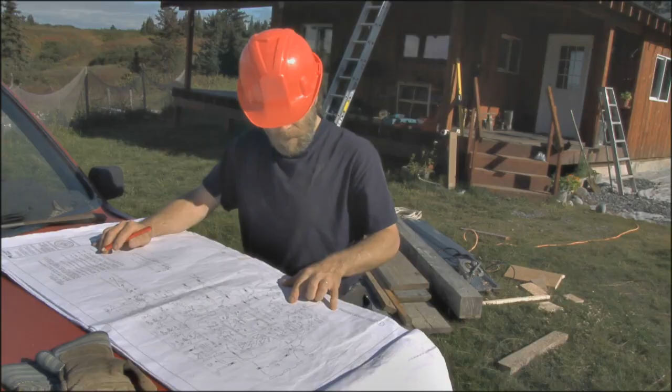This newfound awareness is appearing worldwide, whether it be building codes for new properties or protection enhancements in transportation vehicles. Evidence can be found in many aspects of our everyday lives that proves how the hard work and diligence of the world's brightest engineers and planners have made all of our lives safer and more enjoyable.

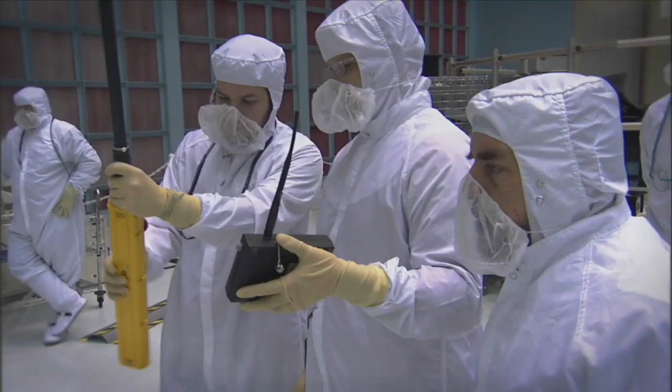The advance toward a safety-first mentality has been embraced by both the private sector and by government, with one of the most high-profile shifts coming from the government agency, NASA.

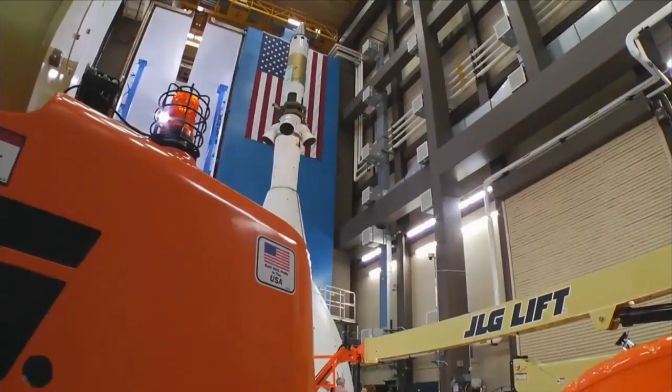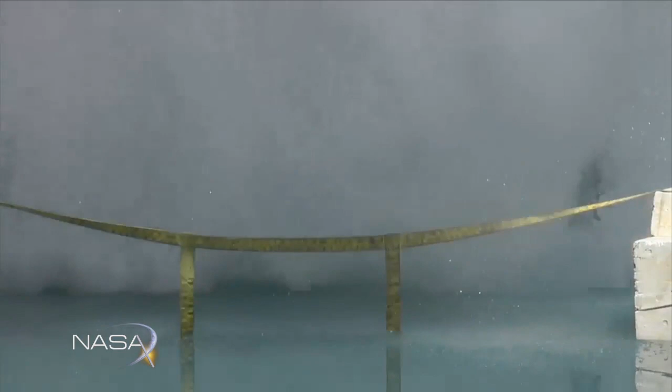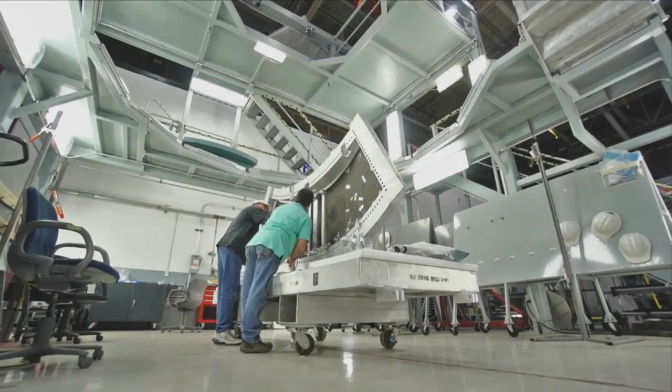Although NASA has always been focused on safety, recent developments in technology, as well as a desire to perfect systems and policies, has led to a heightened awareness within the space agency. Perhaps the most significant organization within NASA that typifies this culture is the aptly named NESC, or NASA Engineering and Safety Center. This highly skilled group is pushing the boundaries on safety even further in an effort to make systems within the agency as safe as possible.

Today on NASA X, we will follow members of the NESC as they test new designs to gain as much knowledge as possible about engineering safety. We will focus specifically on several new designs that will affect future spacecraft, and we will see how computerized modeling paired with hardware tests are now being used to pave the way for safe space systems of the future.

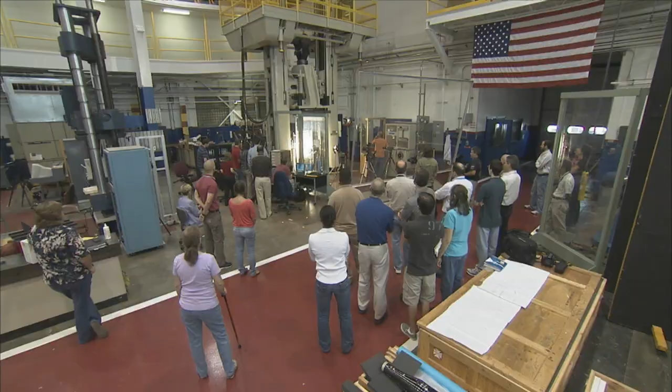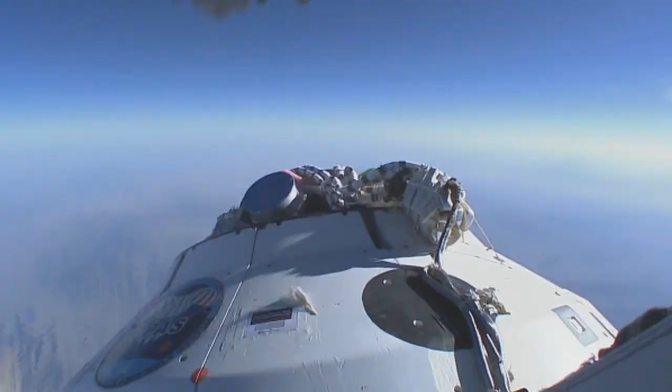As is so often true, our greatest lessons come from our greatest failures. What we learn from these failures influences our future decisions. This was indeed the case for NASA after the 2003 Columbia tragedy. Not long after this accident, NASA's Engineering and Safety Center was formed in an effort to find new ways to adequately address the importance of safety.

NASA realized the necessity to perform value-added independent testing, analysis, and assessments of high-risk projects to ensure safety and mission success. This type of approach assists in proactively identifying issues beforehand, helping NASA avoid future problems.

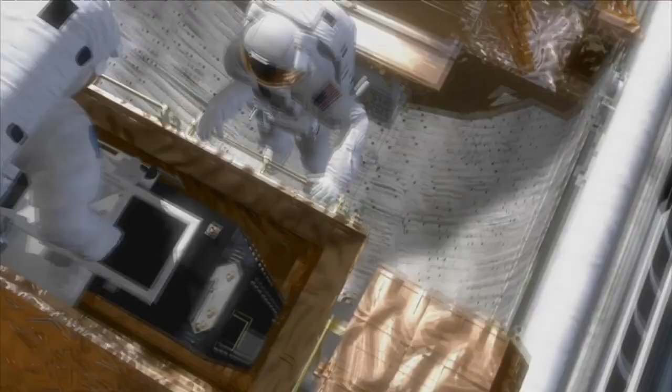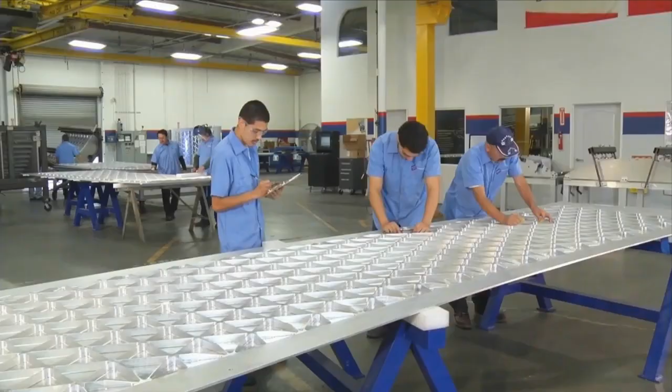At the core of the NESC is a group of technical specialists pulled from all NASA centers and from a group of partner organizations external to the agency. This highly trained group works tirelessly to identify and address potential concerns before they become major problems.

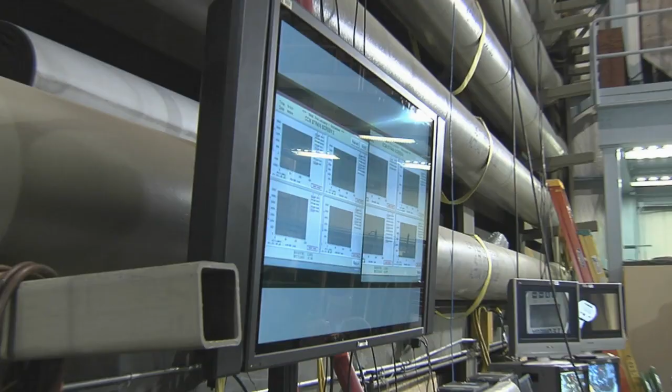Their technical prowess has been used in everything from creating composite crew spacecraft designs for NASA to being asked to help with a Chilean mine disaster a few years ago. With each challenge given to them, the team strives to increase safety and mission assuredness to the highest possible standard.

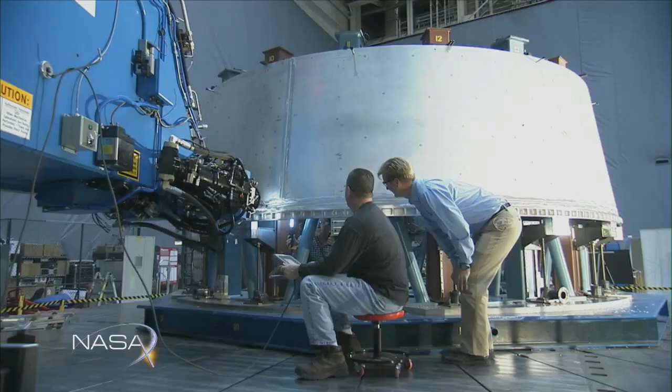The NESC is currently working on myriad technologies within NASA, but one area that has moved to the forefront in recent years is the development of space-rated equipment for future crewed missions. Crewed missions into space are obviously very risky. Even though NASA has years of experience in missions with crews on board, new designs and materials are continually being implemented, which in turn require additional testing to mitigate any safety concerns.

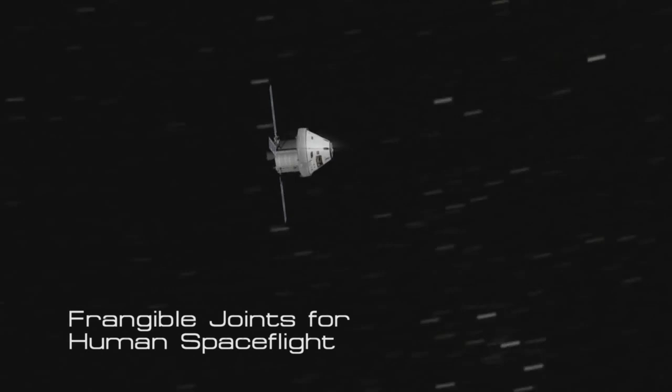One area where additional testing was requested came recently from NASA's Commercial Crew Program. They needed help evaluating something called Frangible Joints for human spaceflight. These are joints located at the separation point of each rocket stage that help each stage release from one another, and if they do not work correctly, a mission failure is almost assured.

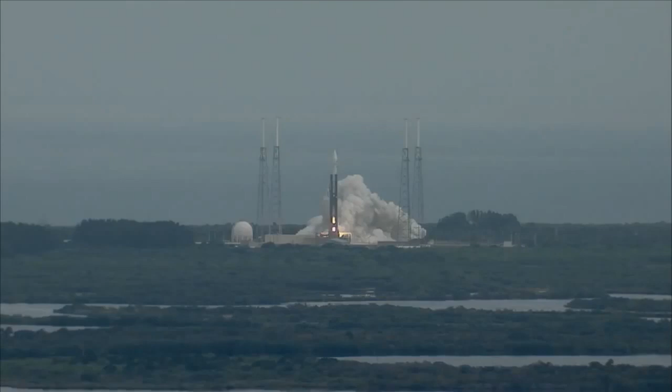To better understand what this is, let's examine how a spacecraft works. Generally, when you see a rocket on a launch pad, like the Saturn V, or a rocket launching satellites, you are not just looking at one big rocket, but a series of smaller vehicles attached to one another. This is called a multi-stage rocket.

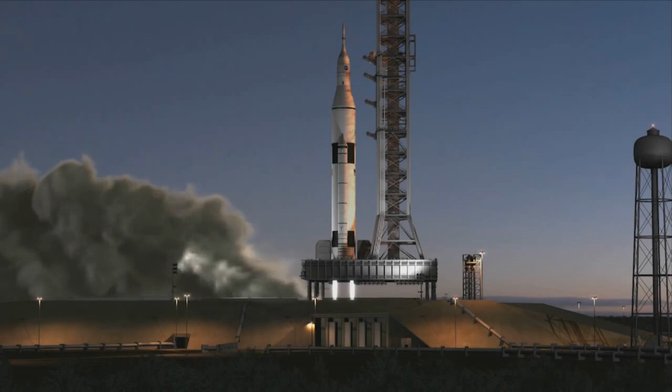In this type of staging, the first stage is at the bottom and is usually the largest. The second stage and subsequent upper stages are above it, usually decreasing in size. In the typical case, the first stage fires to propel the entire rocket upwards. When that stage runs out of fuel, it detaches from the rest of the rocket and falls away. This leaves a smaller, lighter rocket which then fires the next stage. This process is repeated until the final stage's motor burns to completion.

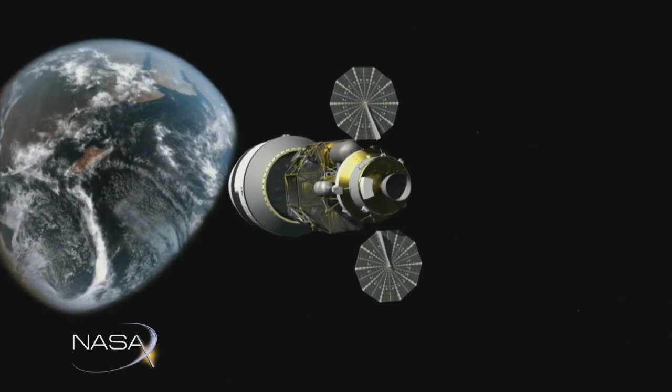If these stages don't separate from one another, the rocket will not be able to break free of the atmosphere and will fall back down to Earth. If an event like this were to occur with humans on board, the crew's lives would be in peril. This is why the NESC is so interested in this process.

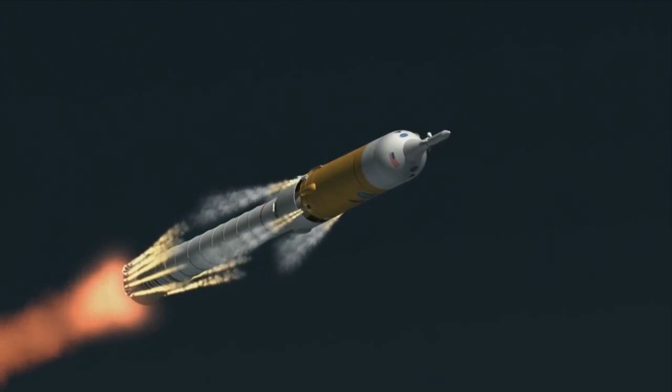Frangible joints have been used on rockets for many years, but most crewed missions of the past relied heavily on other stage separation devices, including frangible nuts and bolts. Although effective, frangible nuts and bolts send out debris that could be damaging to the craft, and they also cause excessive vibration that could damage hardware aboard the vehicle.

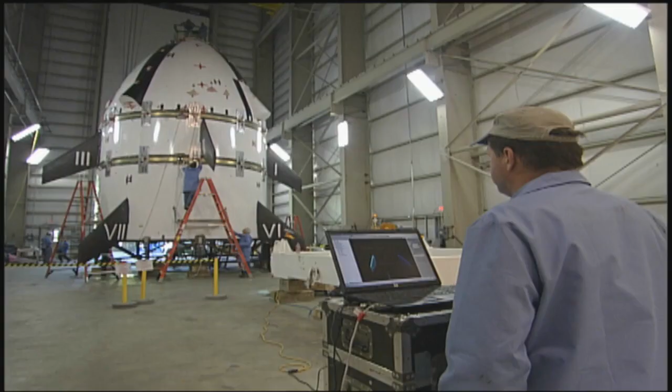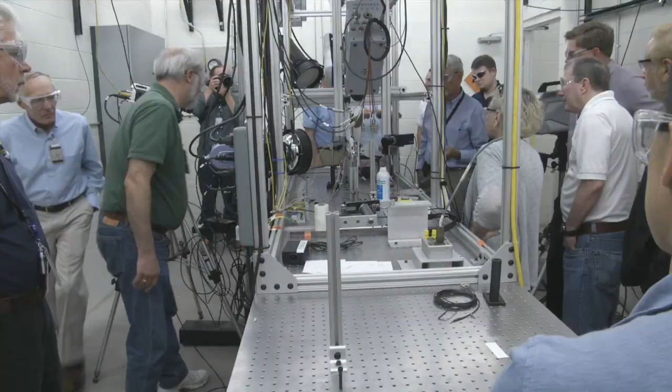In contrast, frangible joints do not send out shrapnel and do not cause the same level of vibration, making them a likely contender to be used on future missions. Although there is already years of data on frangible joint use, the NESC team has determined that more detailed understanding of these joints must occur before they can sign off on its use for future crewed missions.

Here is the frangible joint principal investigator, Clinton Craig, to explain.

Frangible joints have been used for quite some time in the United States, within NASA, within the U.S. military. But it's only recently that they've been suggested to be used with human-rated vehicles.

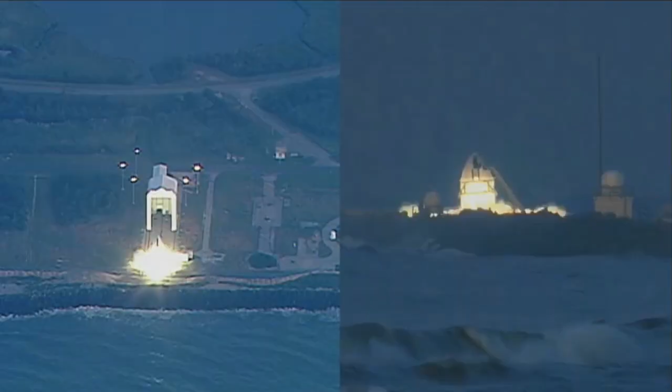So this is a frangible joint that's been functioned. It was used on the MLAS, the Max Launch Abort System project that the NESC accomplished a few years ago. But this is part of that was used.

In this particular design, which is an Ensign Bickford Tang and Clevis design, there was a part that attached here at the top, and within this was the stainless steel tube. It's more round now, but in the beginning it was oval and fit neatly in between the space here between the Clevis and the Tang and the Clevis.

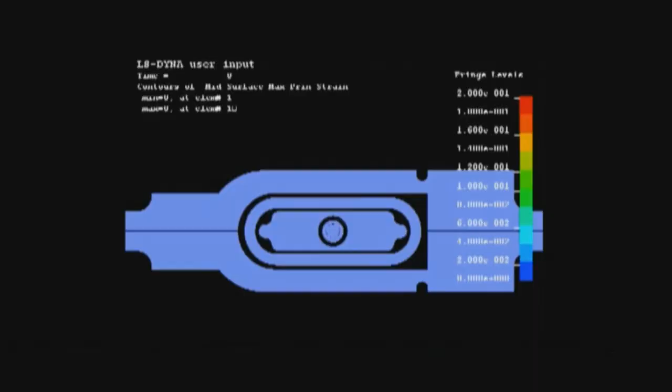And within the stainless steel tube is a charge holder, which is kind of like a squishy eraser kind of substance, and there's a hole in that charge holder where the mild detonating fuse, the MDF, gets inserted. And so when you want this to function, the idea is you detonate both sides of the MDF and it causes the stainless steel tube to expand. And when it expands, these pre-machined notches on either side of the clevis break, and that's all there is.

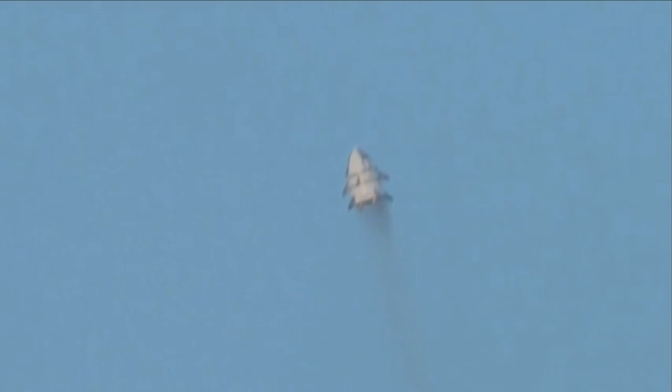So it's a pretty simple design, but one of the things that we've been asked to do is to fully characterize this design, to find out if there are any sensitivities in the design, or if the spacecraft encounters abnormal conditions, is it still going to function, those kind of things.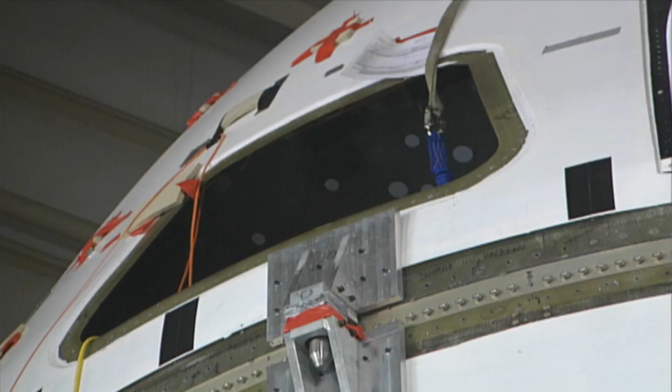Part of the problem with the frangible joints is they are zero fault tolerant, and that means that a single fault in the explosive charge within a frangible joint, if there is a single fault, then it's going to fail. And there are some regulations within NASA that say you have to have a single fault tolerant system, which means one single fault won't prevent proper operation of whatever it is. So that's why we've gotten into the frangible joint business.

After our written report of the historical background and things like that, we were asked to actually carry out this test program, and that's currently what we're in the process of doing.

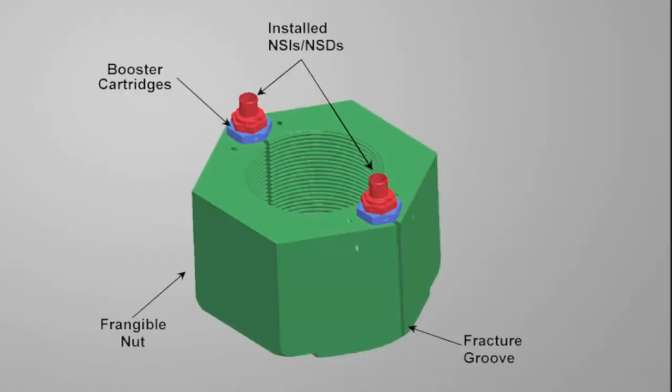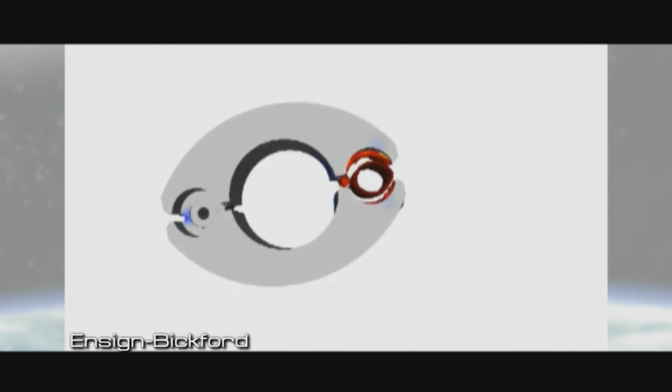And one of the simplest, most straightforward ways to do that, and ways that will create the minimum amount of fragmentation, is frangible joints. So you name the program, whether it's a commercial crew program, it's the new SLS program coming up, it'll use frangible joints. Every mission we plan, Moon, Mars, beyond, will have to deal with stage separation.

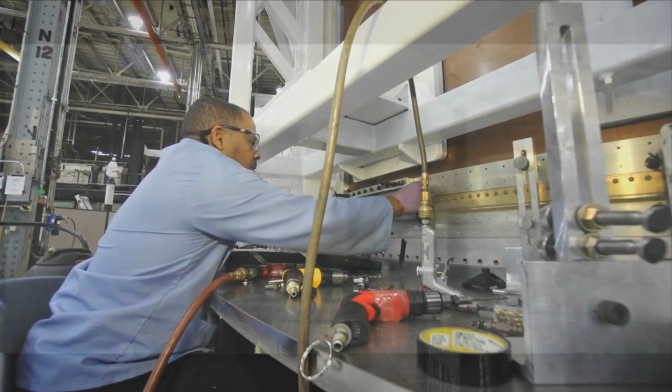Frangible joints have evolved over the last 2 or 3 decades, and they weren't around when the shuttle, to my knowledge anyway, the shuttle was developed. But they have some attributes that people really like about them.

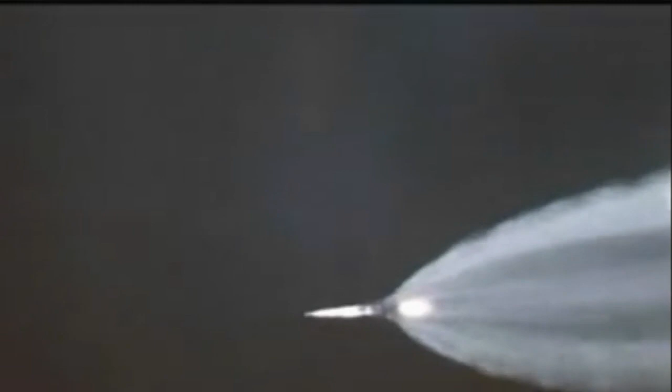In the old days, sometimes they used the shape charge, for example, to separate different portions of the vehicle as it's going up, the first from the second stage. But the shape charges created a lot of shock and debris sometimes, and so that was a downside of using that. The frangible joints themselves, since the explosive is contained within a stainless steel tube, there's no debris, essentially. The only thing that happens is the frangible joint breaks and the spacecraft goes on its way.

Much of the testing for frangible joints is being done here at the White Sands Test Facility in New Mexico. Located close to the famous White Sands National Park, this facility's infrastructure and isolation make it an ideal place to test materials like this.

We caught up with the team as they were going over some recent findings and preparing for an upcoming test. Team members from 7 NASA centers, which is pretty good, and we have a number of technical experts from industry, but we've got about 20 or so core members of the team contributing. Each team member brings a breadth of knowledge and experience to the table to help round out the core group of decision makers.

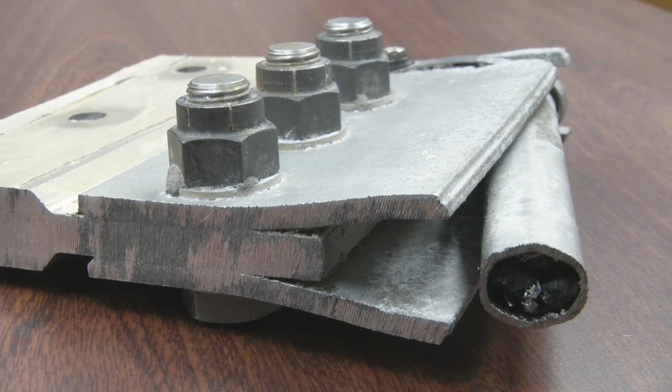Located in this nondescript building, researchers have been testing different frangible joint pieces. As is the norm in research-based testing like this, test planners are performing incremental tests to create a baseline to better understand the characteristics of the joint.

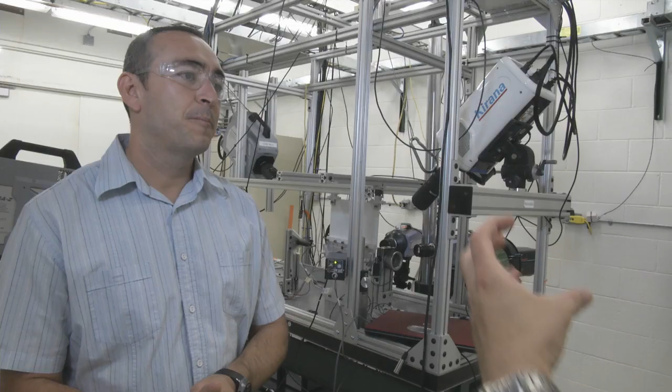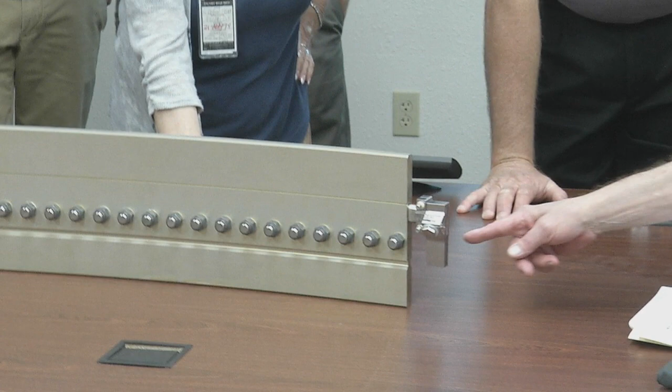Here is test engineer Dox Rios, who will walk us through the test for today. So the test that we have currently set up here is what we're calling a confidence instrumentation and checkout testing, prior to getting the higher fidelity, more expensive test hardware which we'll be using. So we've fabricated in our machine shop sample little short joints that are a 2-piece design. You have a clevis piece and then you have a tang piece, and in between the two you have a stainless steel tube that is loaded with HNS pyrotechnic. Once you let it go, the tube expands, forcing the clevis legs to open up at a little what we call a separation plane, and then the two come apart.

Here at White Sands, they have made several hundred lower fidelity joints to test in this chamber. Each piece is different and tests different aspects of the joint. Some pieces have more explosive than others, some are curved while others are flat, some are thicker than others, but each one helps to fill in the gaps of our knowledge to help us understand what will be the best design.

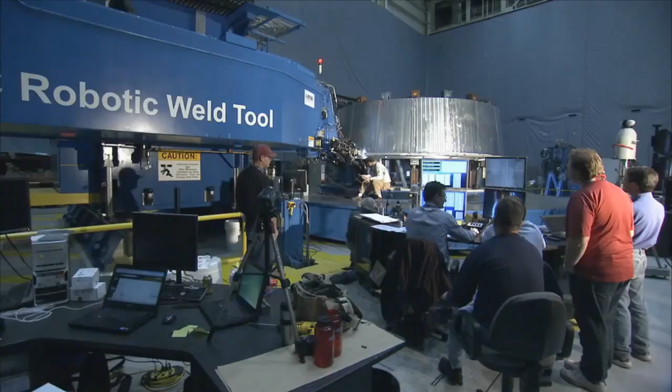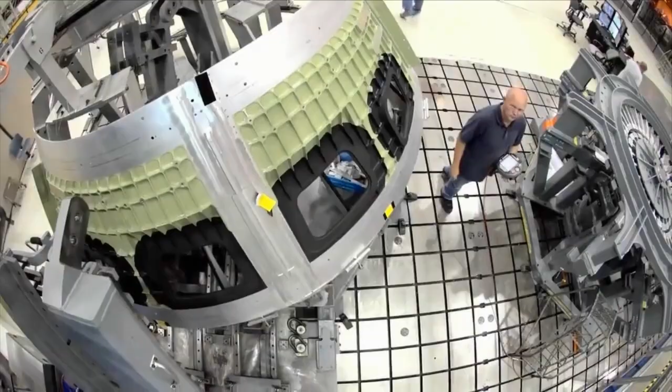As researchers gain more knowledge, they will begin to test the more expensive, higher fidelity pieces, which are nearly identical to the actual pieces that will fly on board missions. On this day, they will be testing a lower fidelity piece that is part of the baseline study.

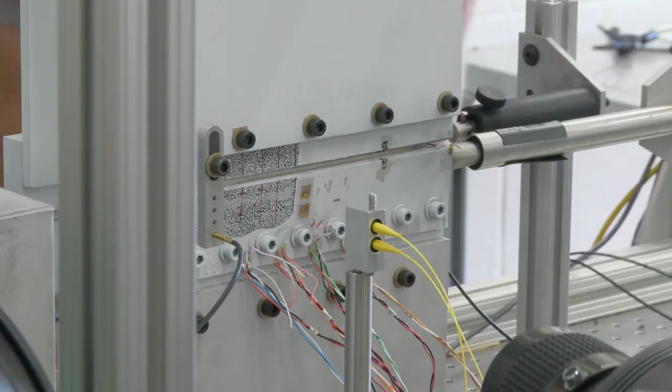In this special room, the test article is placed on the stand. It then has different strain gauges, lasers, and other instruments attached or pointed in its direction to help measure what happens after the detonation takes place.

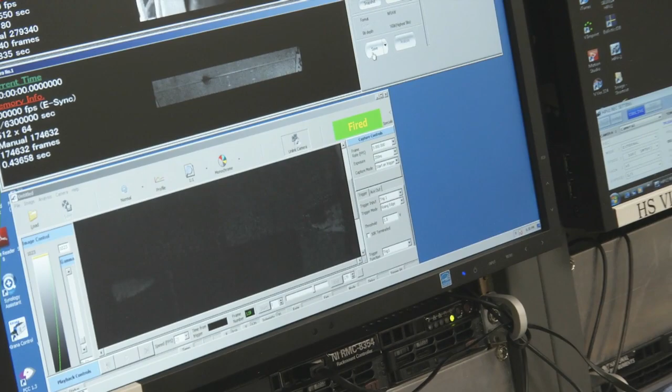Each instrument is important, but some of the most useful tools in the room are the various high-speed cameras that will capture the separation of the joint. Each camera is trained on a specific section and will show different angles, capturing the tests at millions of frames per second, allowing a detailed look at the separation.

As the data starts to pour in, the NESC team begins to get a look at what the high-speed cameras and lasers captured. All right, so we just finished running one of the tests, and it looks like we did get good separation. Right now everybody's going through and reviewing their data to verify that they actually did record. That's part of the validation of the data, to see what we get out of it. Right now we're just verifying that we did get data, and they're going to go look at it to try to validate it.

What I mean is that the joint actually did separate, which is the intent of the joint, it's supposed to separate. So whether each one actually looked and they actually saw the crack initiate, to try to do what we were trying to do, that's what we still need to go back and look at.

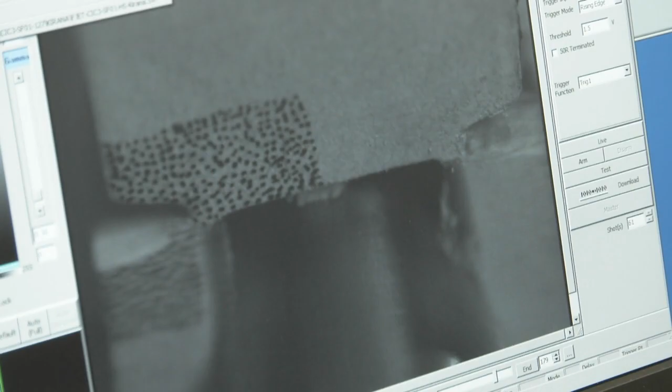Preliminary results seem to suggest a successful test. Now researchers will go back and place the data into a computer model to show the complicated dynamics around that particular separation. Tests like this will go on for about a year or so, until the planners are sure they understand all the dynamics involved with frangible joint separation.

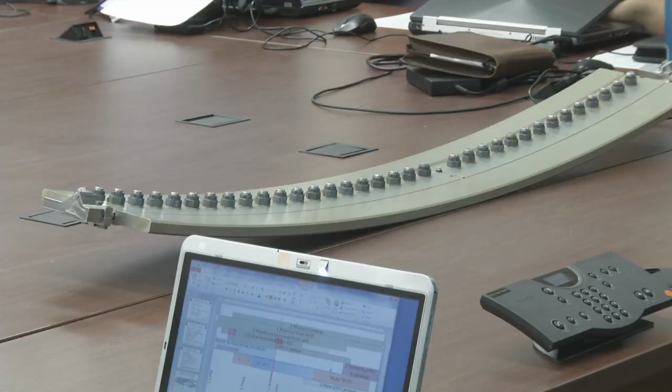If frangible joints get through this testing phase with flying colors, then we may all soon be seeing them on spacecraft in the near future.

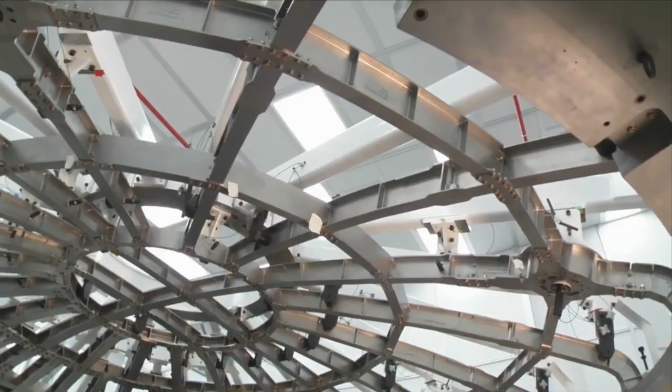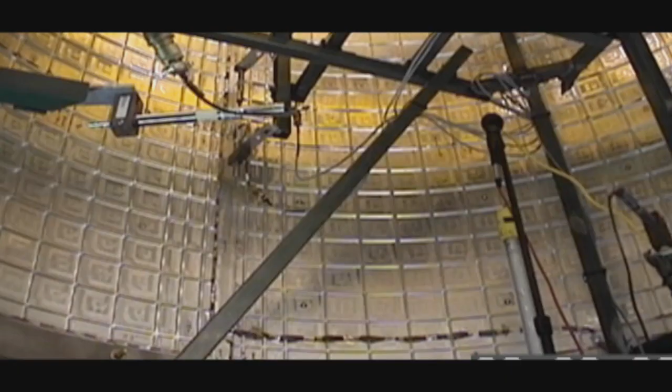Far from just focusing on one issue, the NESC is also looking at other safety issues related to human spaceflight. One area that has garnered much interest recently is in the area of shell buckling. If you have ever seen old footage of early rockets collapsing on themselves or breaking apart on the launch pad or just after takeoff, then you know what shell buckling looks like.

Because so many launch vehicles are cylindrical, this type of buckling is one of the primary failure modes that occur in launch vehicle structures. In the past, the way researchers would get around the structural problem would be to make the launch vehicle much stiffer, which in turn made the craft much heavier.

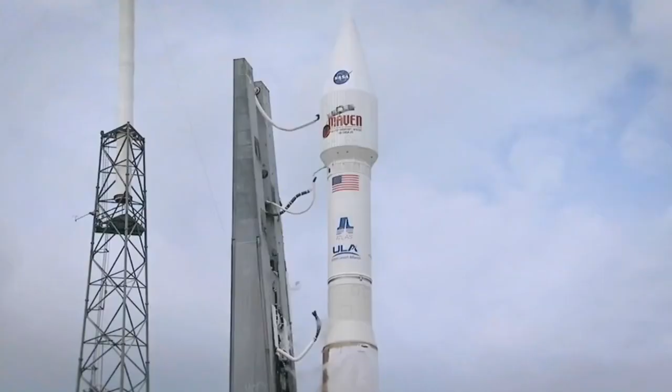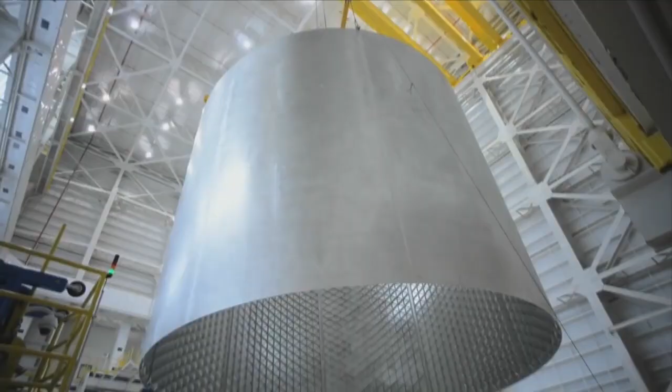With an average cost of about $10,000 per pound to launch something into space, each extra pound drives up costs of missions and also limits the size and amount of scientific instrumentation that can be flown. NASA researchers are not satisfied with the status quo and have begun to design new shells that are structurally very strong, but also much lighter as well.

Here is NASA's Mark Hilburger to explain.

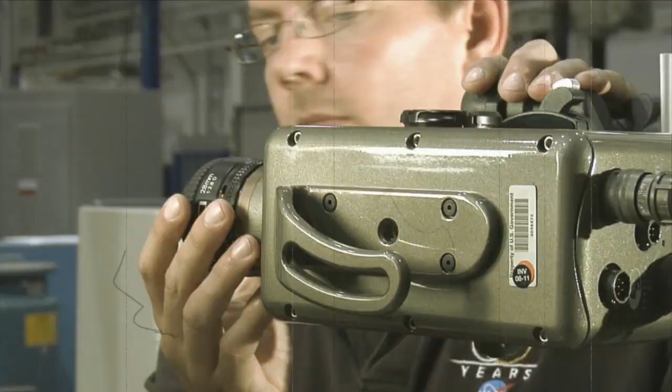Designing a launch vehicle, one of the primary failure modes is buckling. Buckling is basically a loss of stiffness in your structure when the sides of the structure collapse, like a beverage can. And in the early years, they were using very conservative design guidelines and factors associated with that design problem.

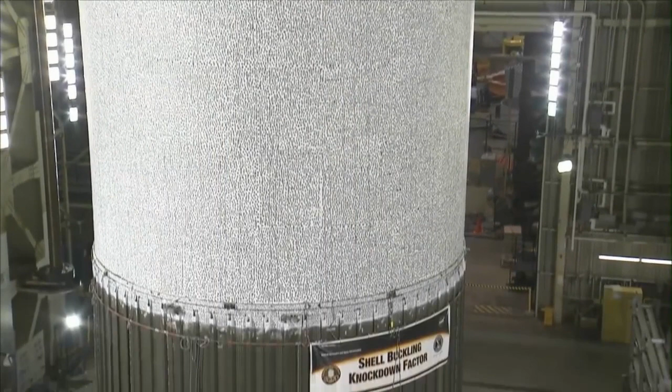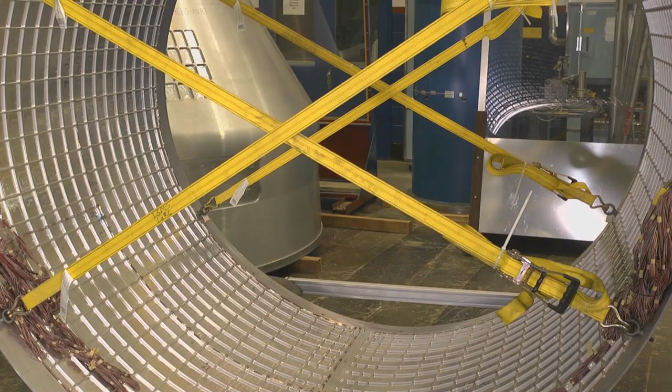One of our main goals was to provide new factors that are less conservative, to give designers of our more modern launch vehicles design guidelines that would enable lower weight structures, but structures that are actually more robust and safer because we're taking into account modern design features, modern materials, and construction methods. The past design guidelines for shell buckling were produced based on data from the 1930s to the 1960s, when they were just then trying to understand the buckling phenomenon.

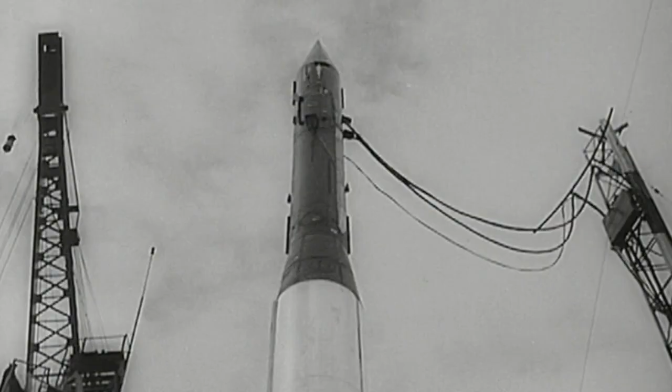If you've ever crushed a beverage can under your foot, it's a very dynamic, complex collapse type of behavior. So they were very conservative about how they developed their design guidelines. Since then, we've become a lot smarter in the physics of buckling.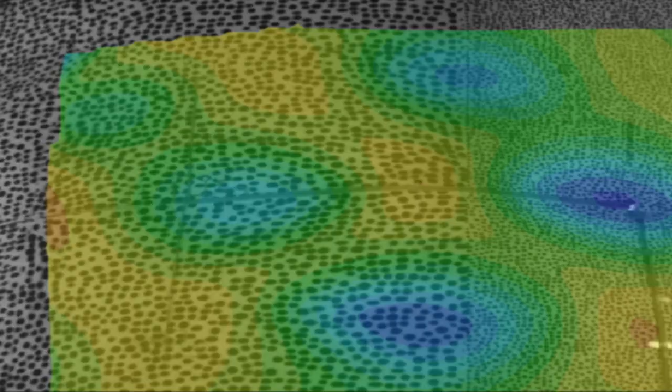We have very accurate computer simulations that are backed up by very carefully conducted testing. So what our project has been doing has been carefully studying the buckling problem for modern day launch vehicles and developing very accurate simulations of the buckling process.

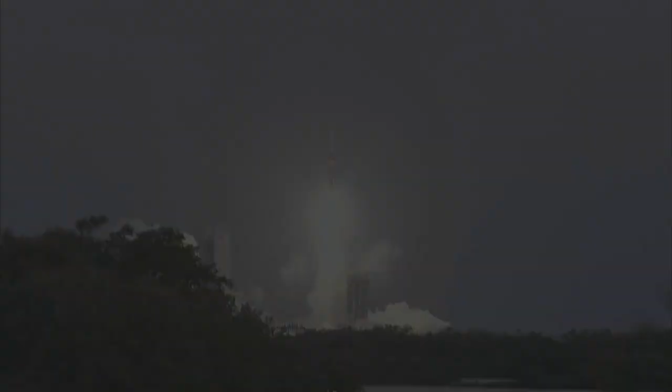When you have a launch vehicle, they're subjected to many different types of loads, and the primary loads that we're worried about are the ones involving compression of the structure or bending. When the launch vehicle's flying through the atmosphere, it sees aerodynamic loads that cause bending as well as compression loads, and those loads can actually cause the structure to buckle.

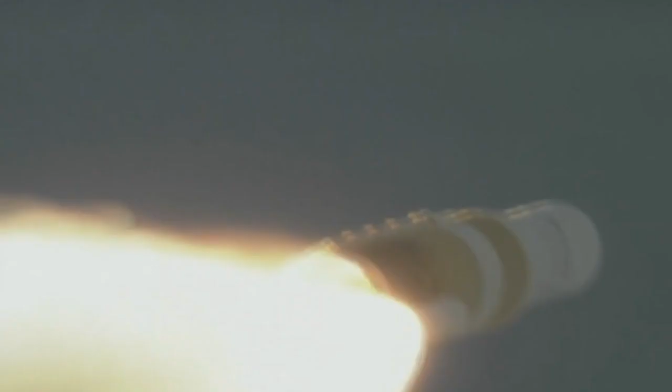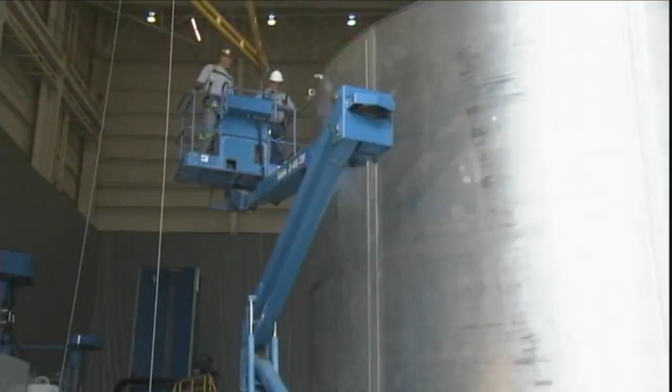While these are much, much larger structures, they still exhibit the same type of buckling failure modes, and it turns out to be one of the primary driving design factors in these vehicles. So it's very important that we provide safe design guidelines, but at the same time provide guidelines that enable efficient structural design. We're very much interested in having a very lightweight structure.

We've conducted 4 tests on these smaller scale, 8-foot diameter barrels. These are about 30% scale to the full-scale SLS type vehicle. We've also completed 2 full-scale tests, one most recently in December of 2013.

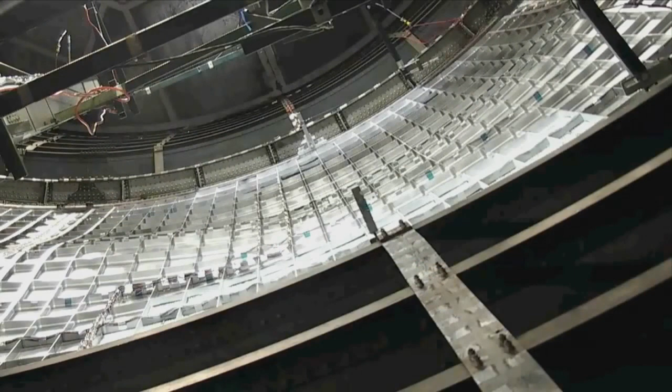We're running these tests to validate our computer simulations, because in the past, they relied solely on test data to provide guidelines for design. What we're doing now is we're validating our computer simulations with a select number of tests and then using the analysis tool to develop the design guidelines.

So that saves us a lot of time. It also saves us a tremendous amount of money in testing because these tests are very, very expensive.

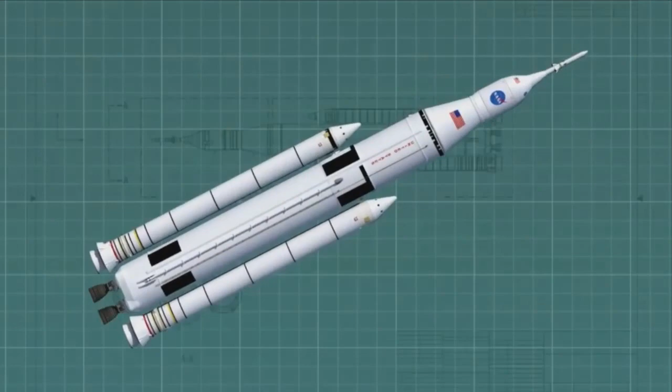One of the highlights of the project so far is we've actually been able to develop and implement a new set of factors for NASA's Space Launch System, the SLS vehicle. And they've implemented them into their core stage design, their first stage of the new rocket. They've seen significant mass savings as well as some time and cost savings associated with the new factors.

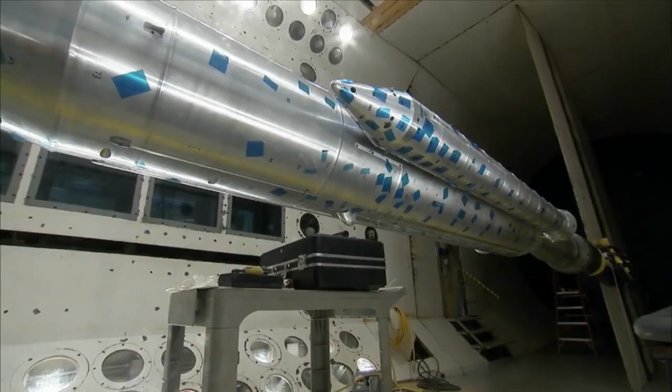I think this is definitely going to stand the test of time because not only is it going to be a set of numbers for the types of structures we're building now, but it's actually a methodology that's being defined, so it can be applied to whatever future constructions or whatever future materials come around. There's a lot of work that will be associated with that, but we've at least shown a path forward on how you can design, test, and analyze these types of structures at a very high level of fidelity.

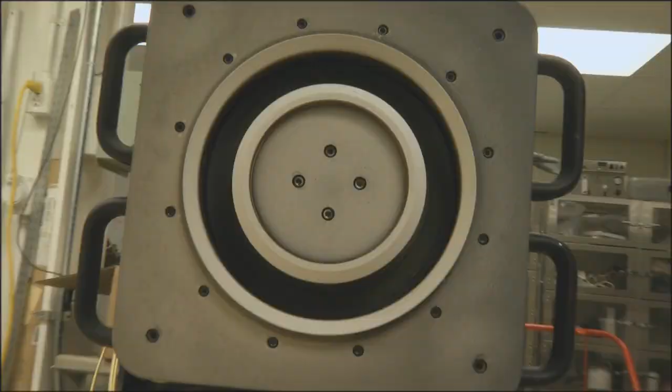The NESC is looking at many ways to make NASA safer, and as is the norm with NASA, often this safety that is highlighted for NASA trickles down into products that can be used by the general public as well. In coming years, NASA explorers will once again be pushing back the boundaries of the unknown as they travel into near-Earth orbit and beyond. It is comforting to know that there is a dedicated group within NASA who are working hard every day to make those future missions as safe as possible.